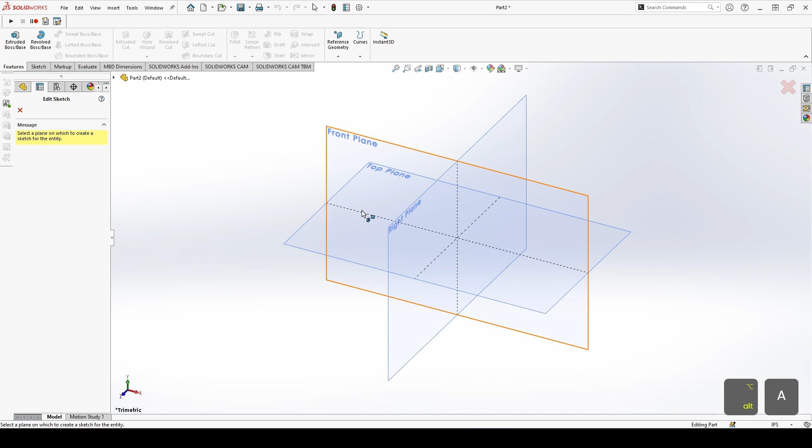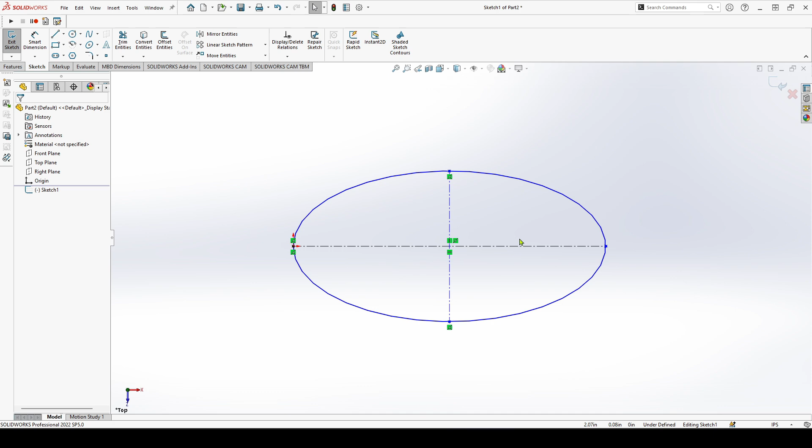So we know that we have an ellipse. So let's go ahead and add our ellipse in. That begins at the midpoint, goes out to some height. Then we're also going to add in a construction line between the two of those. So that gives us our ellipse. Let's go ahead and dimension it now. We know that's going to be 1.6 across and 0.5 across that way. So this is going to be 1.6 across, and this is going to be 0.5 across that way.

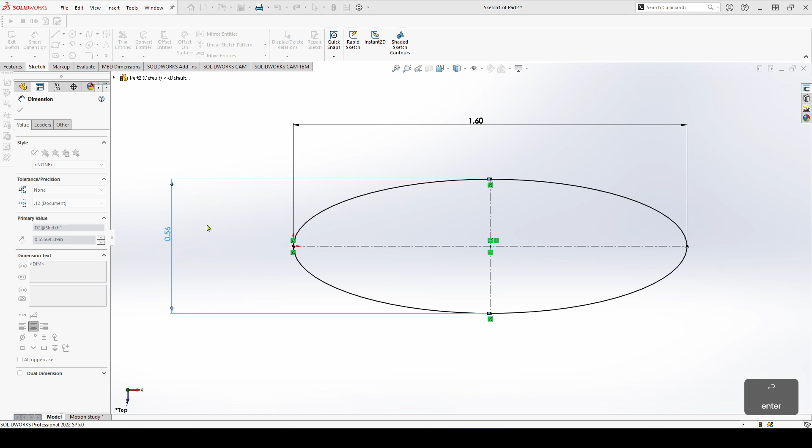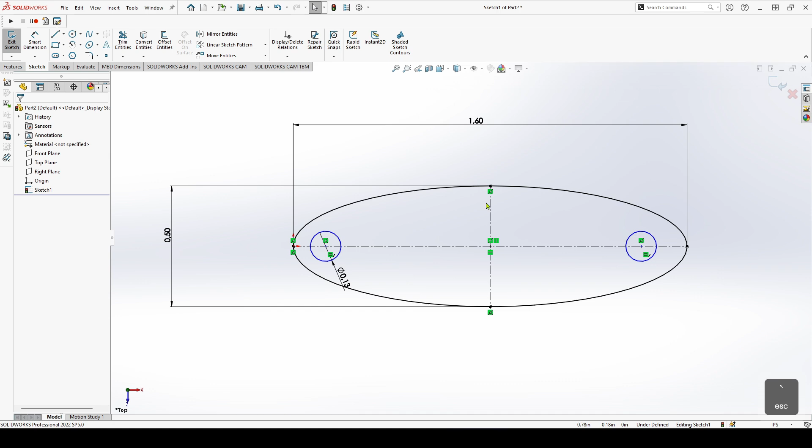Okay, and then we have two holes on either side at a diameter of 0.125. So let's head back to SolidWorks, add in those holes at 0.125 on both sides, and we'll set these two equal to each other. Okay, and then the distance away from the edges are equal as well at 0.175 from both sides.

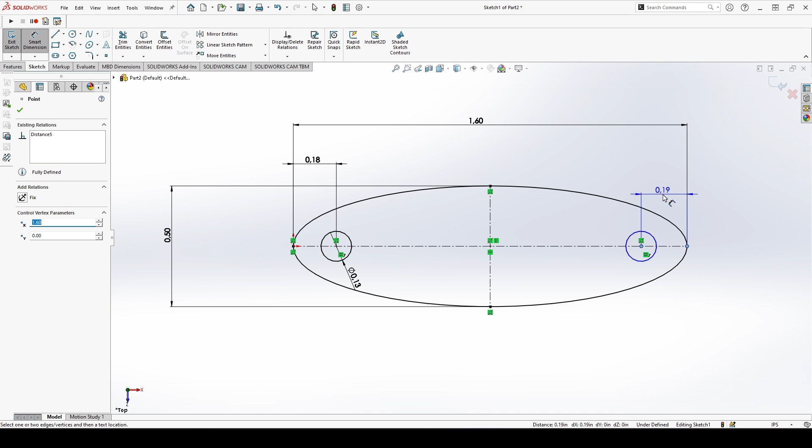Heading back over to SolidWorks, we can dimension that from here to there at 0.175, and it's going to be the same on this side, but this time we're going to set this one equal to that. So if ever we do need to change the distance, we only need to change it in one place. If ever you see this little sigma symbol, that indicates that there's an equation there, and that's related to something else. Okay, so let's go ahead and confirm this.

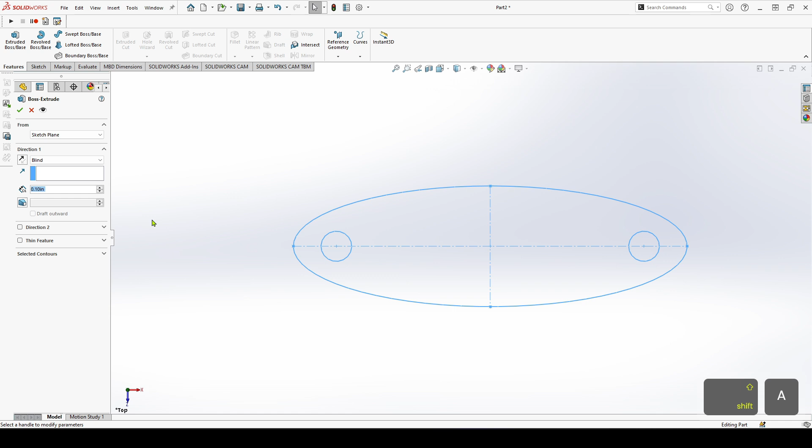And back to our question, we need to extrude to a height of 0.15. So heading back to SolidWorks, let's extrude 0.15. Okay, next step would be this segment here. So we have a diameter up here of 0.45 and a depth of the same. So let's head back to SolidWorks and do that now.

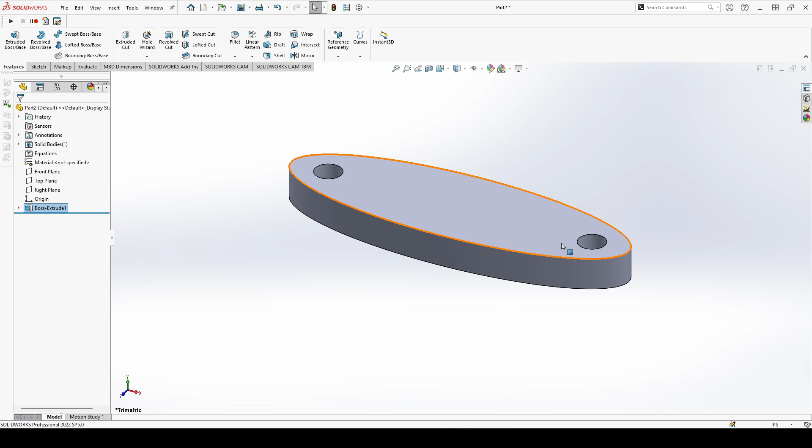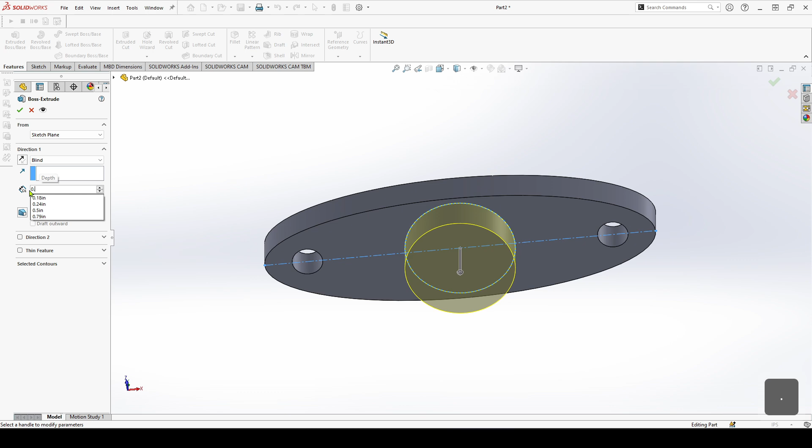So down here, starting from the midpoint, so let's establish our midpoint. 0.45, and extrude to 0.45. Confirm, and the last thing to do would be to add this hexagonal cut extrusion in. So here they give us not a depth of the cut, but a distance away from the face of the flange. So we'll need to use a slightly different setting in our cut extrusion, but again, no biggie.

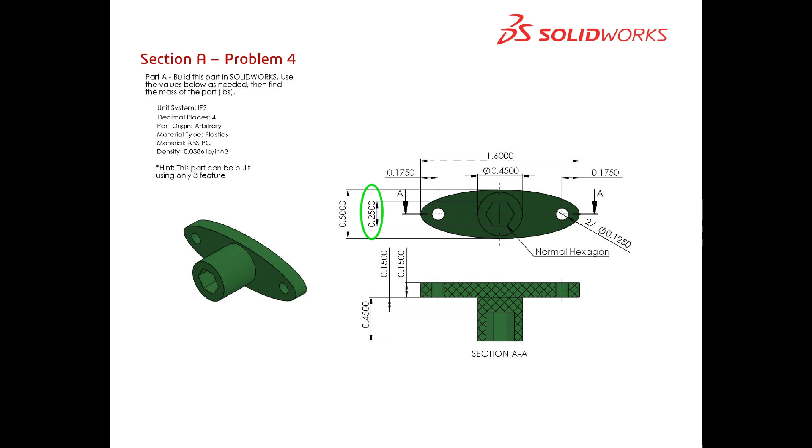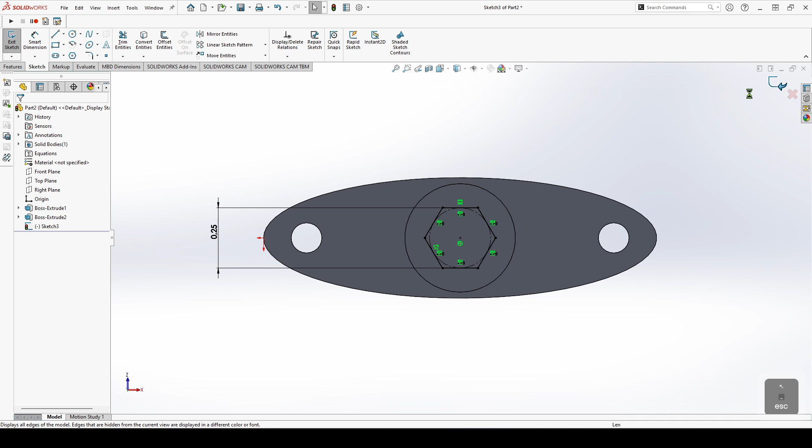Our distance across flats is going to be 0.25. So let's head back to SolidWorks and do that now. We're going to need to use our polygon tool, distance across flats of 0.25, and to constrain it we need to indicate that that would be horizontal and fully constrained. All we need to do now is extrude, and the depth we need to extrude to would be offset from surface, that surface. The distance to offset by would be 0.15.

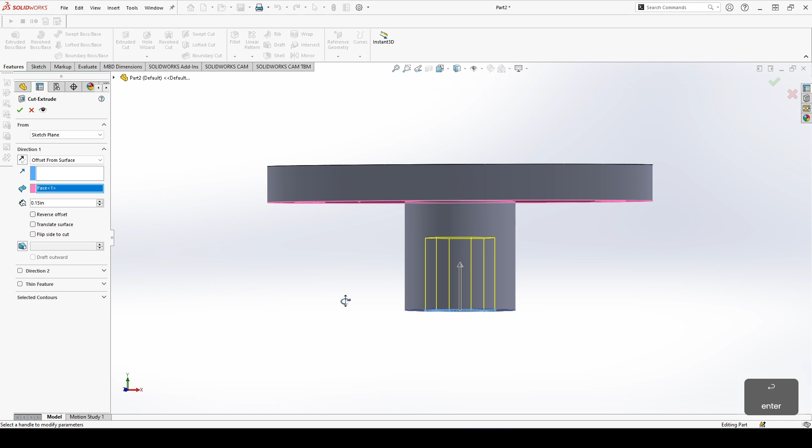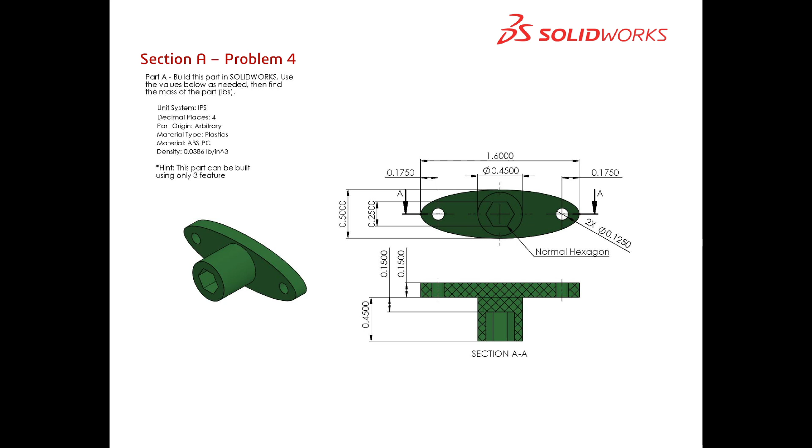Adding that in, you can see that that doesn't go all the way to the end. It's offset from the bottom of the flange by the distance that we indicated. We can confirm that and add in our material. According to our question, our material is ABS-PC. So let's do that now. Edit material. You can search for that, ABS, and here we see ABS-PC. I'm going to apply.

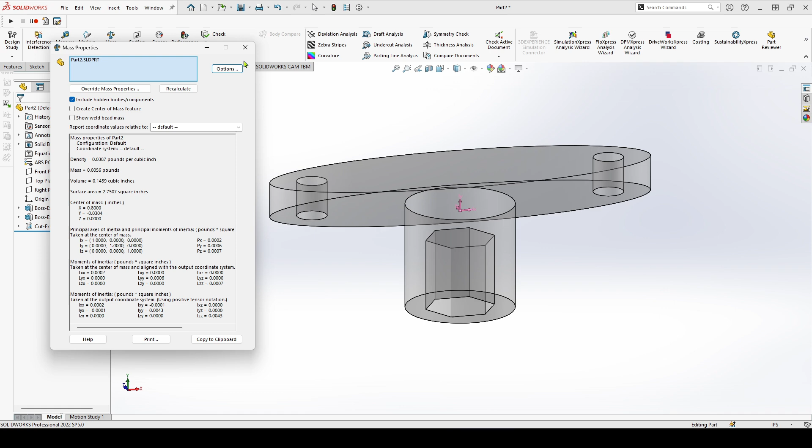And finally, to confirm our mass, if you remember in our question, we needed to work to 4 decimal places. So we need to change our settings to give us 4 decimal places. Going to options, we can use custom settings and pump that up to 4. So there we can see we get a mass of 0.0056 pounds. Let's head over to our PDF and confirm our answer. Our answer is 0.0056 pounds. So I hope you guys got that right as well.